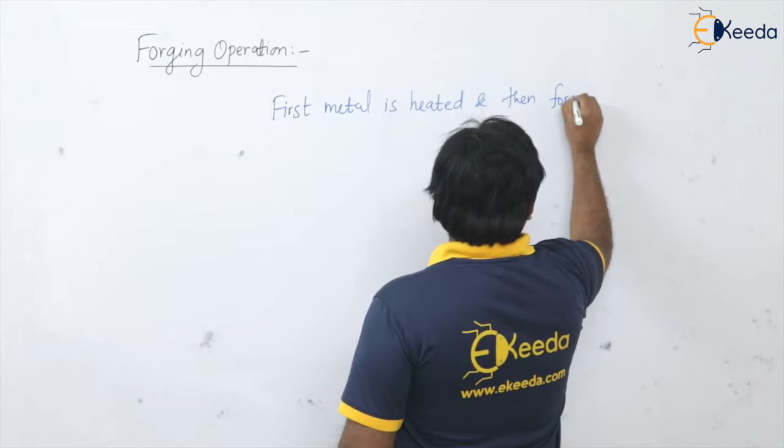So here first we heat the metal. First metal is heated, and then force is applied to manipulate the metal to get required size and shape or shape and size of the component. This is the forging operation.

And the stresses induced here are of course the pure compressive stresses that are going to induce into the material.

The forging operation is one of the oldest metal forming processes which is known to mankind since the Copper Age. This forging operation can have the hot forging operation, or sometimes we can use the cold forging operation also.

Now a very important characteristic or property of the forging operation is the manipulative ability, isn't it? The manipulative ability to control the grain flow. So that is a very important thing for the forging operation.

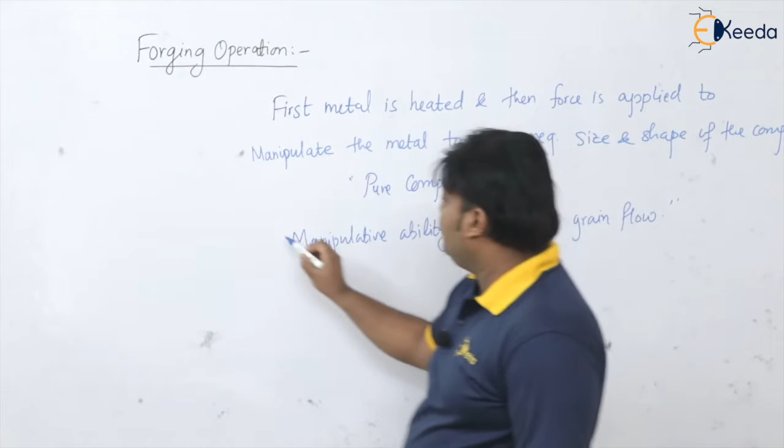Please remember, because of this manipulative ability to control the grain flow, we can get the best mechanical property in the specified direction. That is a very important characteristic of the forging operation. So required orientation of the grains is possible. Because of that, wherever and whatever good mechanical properties we want to impart in the product, we can easily get.

Now, as already discussed in the beginning of this topic, the limitation of all metal forming processes is that we can only go for uniform kind of shapes. But forging is the only metal forming process where, up to certain extent, we can produce some non-uniform shapes of the component.

Please remember, by using the forging operation only, we can have some extent of non-uniformity in the shapes of the product. But the limitation of forging itself is that we require a huge amount of forces and power consumption. If you require a higher amount of force or load, you need that much amount of power consumption. So the force and power consumption is quite high in the forging operation.

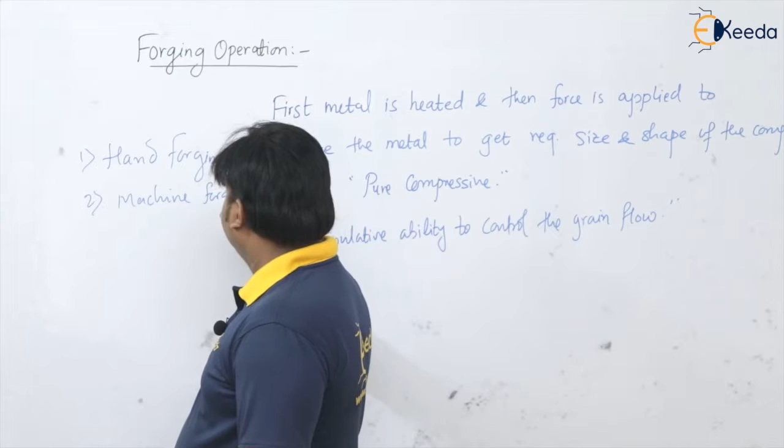In hand forging, whatever force is needed for deformation of the part is given with the human hands. Generally drop hammers are used for the force. That's why these are called hand forging operations. An example of hand forging is the blacksmith operation we have seen.

Now if you look at machine forging, we have press forging. In drop forging here the forces are applied by drop hammers, so the impact forces are going to form. These forces are sudden, and the kind of force, impact force, is going to apply on the product.

But in press forging, whatever force is applied on the component is not the impact force, it is not a sudden force, but it is the simultaneous force. Please remember.

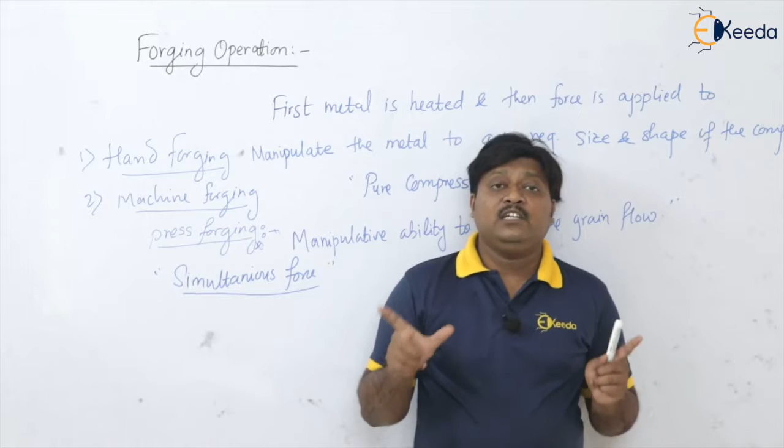So this is actually the press forging, and we can directly have the drop forging. Please remember, drop forging and press forging are the main classifications that we have, and these are actually the closed die forging operations. In both the operations, the closed die is used.

In case of drop forging, the billet material, that is the raw material, is kept on the lower die, whereas in press forging, we are keeping the material into the die. That is the basic difference.

And the force applied in drop forging is sudden force, the impact force, whereas in press forging we are having the simultaneous force. So simultaneously we are applying the force for deformation of the material, not instantaneous or impact loads. Please remember this.

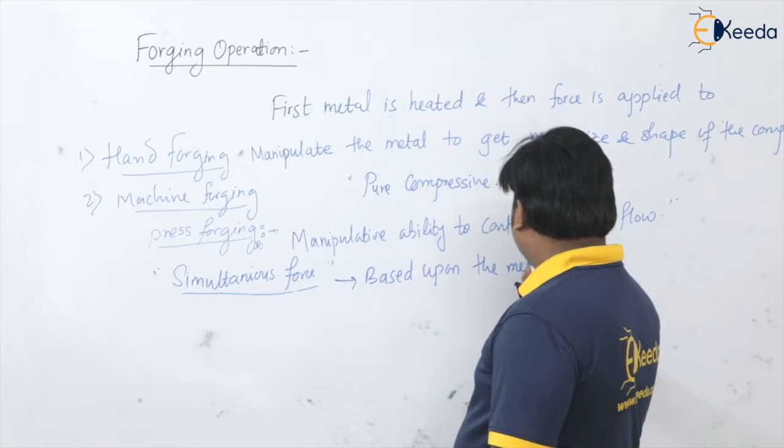Now, based upon the shape of the product obtained into the die, we are having the classification for forging operation, for press forging I am saying. So based upon the method of shape obtained, we are having number one, open die forging. Second, we are having closed die forging. Third, we are having semi-closed die forging.

And fourth, the bar forging. Let us see it one by one.

Open die forging is very simple. If the metal is kept between two dies and we apply force to get deformation, in open condition we are applying the force. This is open die forging, where we simply apply force between these two dies. The lower die is stationary, and the upper is a moving die, or moving platen. Die is also known as platen. Here is the material, and we apply the force. So this is open die forging operation.

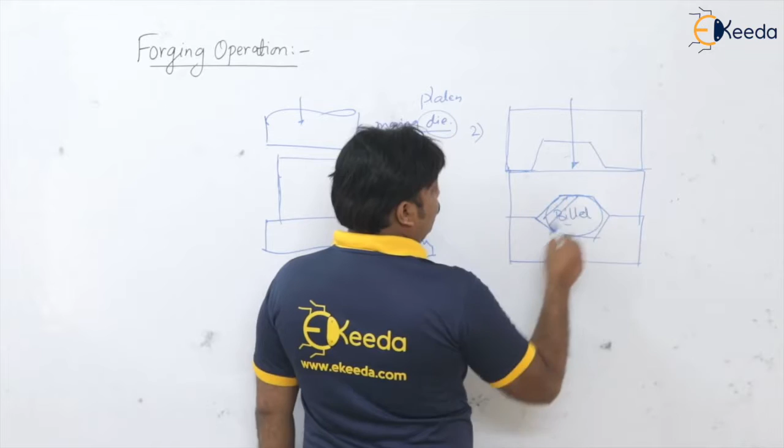Now you apply the force, and this billet material flows into each and every corner of the die as the dies meet together, and the entire surface becomes closed. After some time the die will be like this, so that the billet material flows to each and every corner in the die, and the part gets shaped like this. This is in closed condition, when the two dies are closed. So this is closed die forging operation.

This is the second one. First is open die forging, second is closed die forging. Now the third is what?

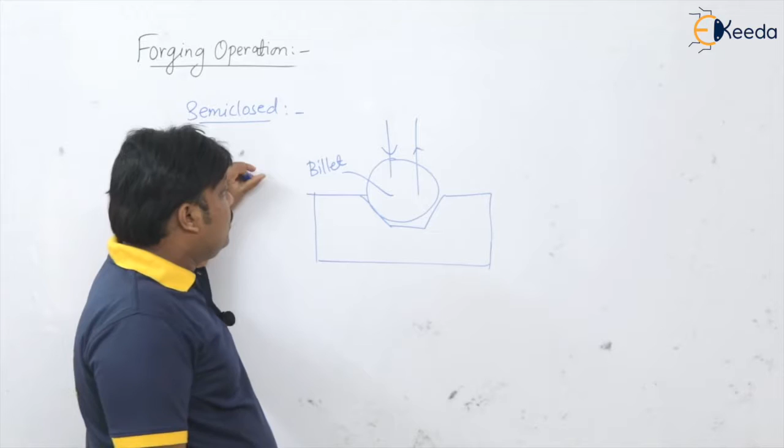We have semi-closed die forging. No doubt we use a die for the work, but here the forces are applied in open condition, just by changing the position of the billet material between the strokes given by the hammer or die. Whatever shape is on the die, the same shape is obtained on the material. Here, using this closed die, forces are applied in open condition by changing the position of the billet between strokes. That is why it is called semi-closed die forging operation.

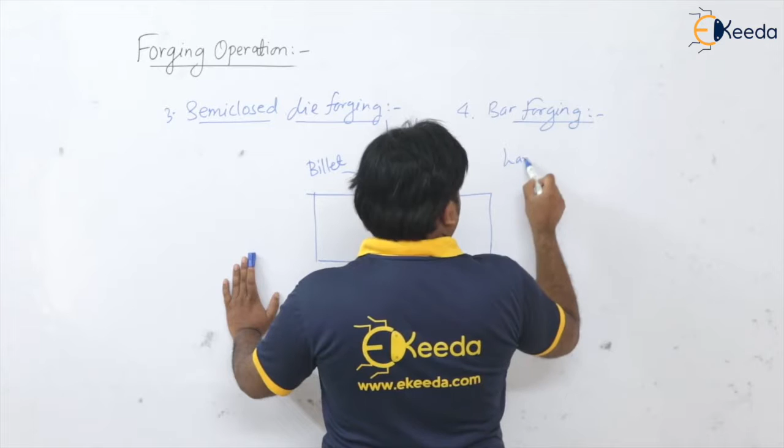The last one, the fourth and final type, is bar forging. Whenever we have very large components, if the component is very large, to deform it in forging you need a large amount of force and power consumption to achieve this.

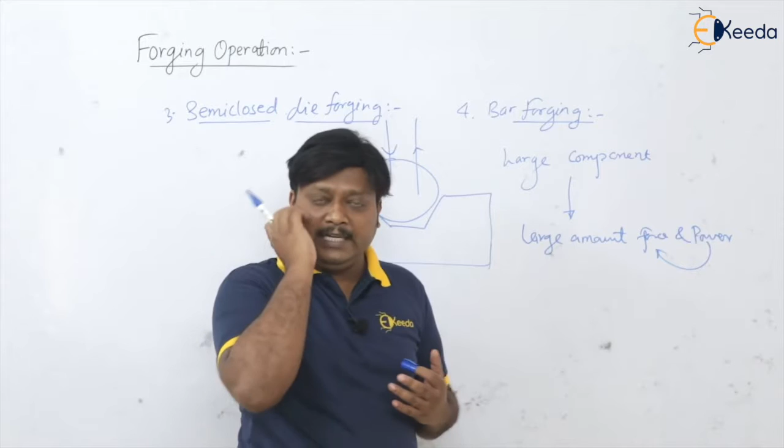So in that case, instead of forging the product at a single stroke, we forge the part little by little, separately. Instead of forging the entire component at a single stage or single blow, we use a number of steps, passes, or blows. We forge small portions repeatedly until the large component is completed. So instead of forging the entire part at a single stage, we forge a little quantity at a time, and using this repeated small forging we get the entire component. This is known as bar forging.

So these are the techniques based upon the method of shape obtained by the positioning of the component: open die forging, closed die forging, semi-closed die forging, and bar forging. This is the basic classification of the forging process.

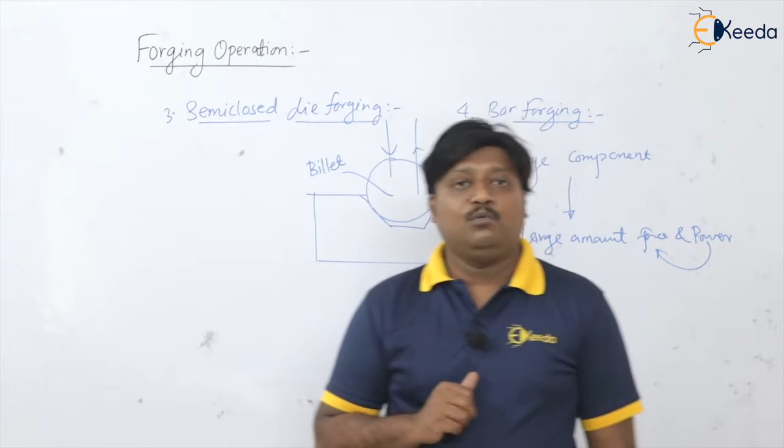Now we are going to see the analysis of forging operation. For that, I am taking the top die, which is moving, and the cylindrical billet is placed on the bottom die, which is stationary. So this is the top die, this is the bottom die, and this is our cylindrical billet material or raw material.

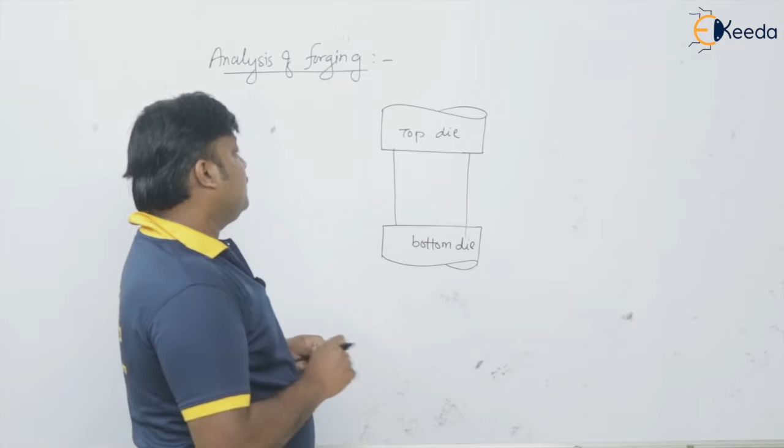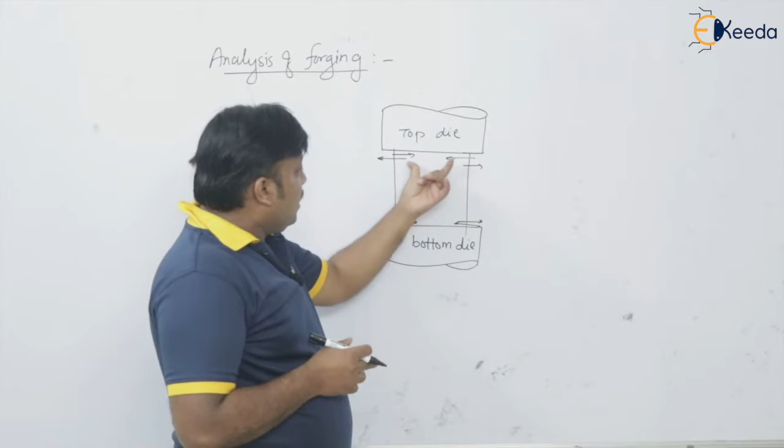In the initial condition of forging, when force is applied by the top die onto the workpiece, outward expansion forces and inward frictional forces exist at the interface between the die and raw material. So initially, when the force is applied by the top die onto the billet material, at the interface of the die and billet, outward expansion forces and inward frictional forces come into play. Here, the inward frictional force is greater than the outward expansion force.

So because of that, what is going to happen? The raw material or this billet material is going to stick on the die surface. When the die is moving towards the center of the height of the component, the outward expansion forces go on increasing, whereas the inward frictional forces stay the same. As these outward expansion forces increase while the die comes down, there will be bulging of this cylindrical raw material, meaning the diameter increases at the middle.

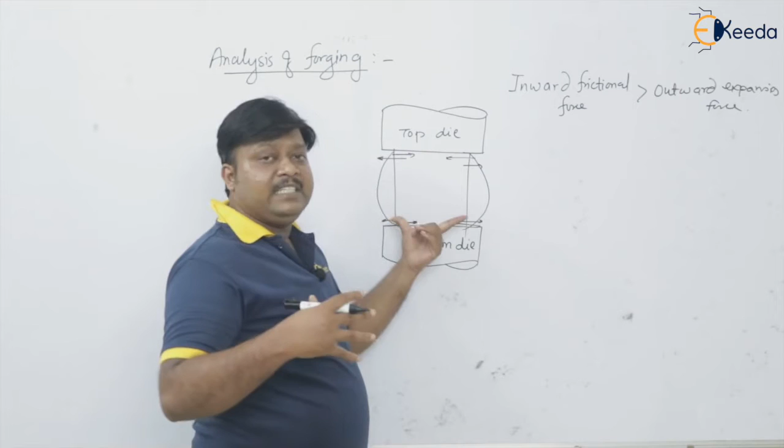That is also called barreling. Bulging or barreling will occur because of the outward expansion forces going on increasing.

This first initial condition of the forging operation we can call the sticking condition, where the material sticks on the die surface and bulging occurs. So the first part of the forging operation can be analyzed by the sticking friction mode.

Now the die moves ahead to get this billet material forged. So at some moment, what happens? The outward expansion forces become more than the inward frictional forces.

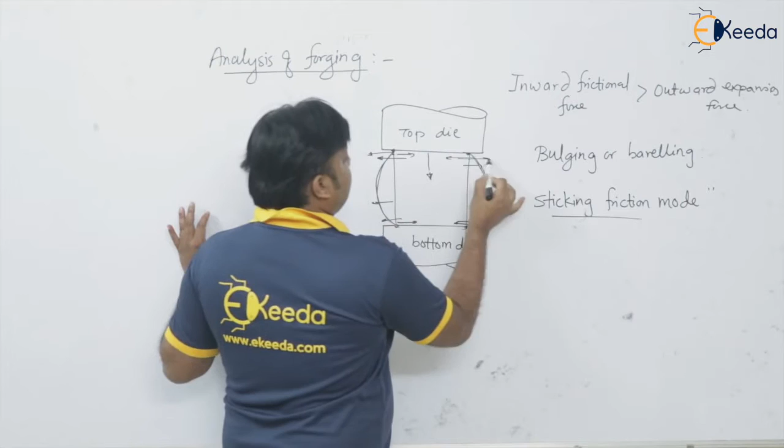After a certain time, the inward frictional forces are stationary and constant, but the outward expansion forces go on increasing. That's why the material now starts to slide over the die surfaces, and because of that, we now get the straight cylinder.

Before there was barreling, and at the ends the material was sticking to the die surface. Now, because the outward expansion forces are more, the material slides over the die surface, and we get the straight cylinder. So bulging disappears and you get the straight cylindrical workpiece having changed dimensions.

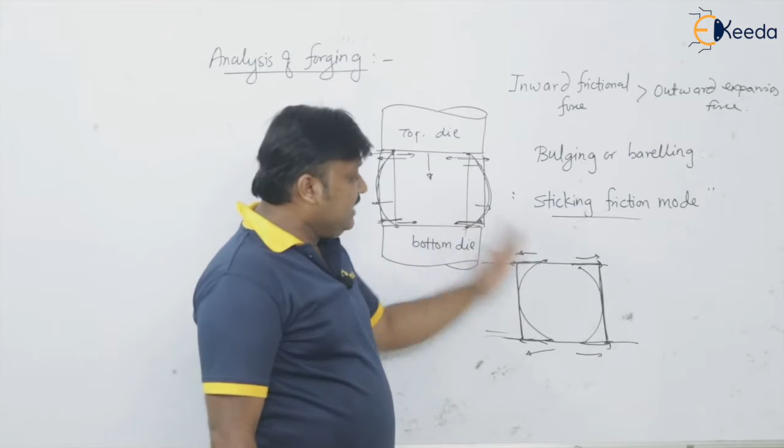Suppose the original diameter D0 was there initially, and original height H0 was there initially. Now the diameter becomes D final and height becomes H final. You can see, because of this upsetting, this is nothing but open die forging — between the two dies we are compressing or deforming the material. This is the upsetting process, so there will definitely be a decrease in height and increase in diameter.

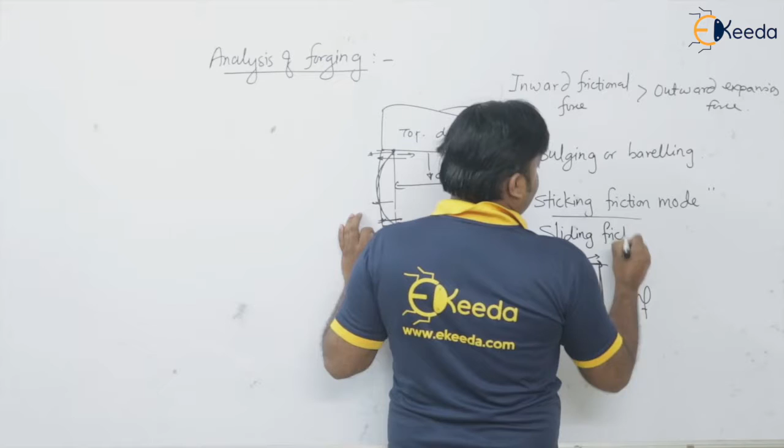So this second part of the forging operation is known as sliding, and this second model, the sliding model, can be analyzed by the sliding friction model. So the forging operation can always be analyzed first by the sticking friction model and then the sliding friction model.

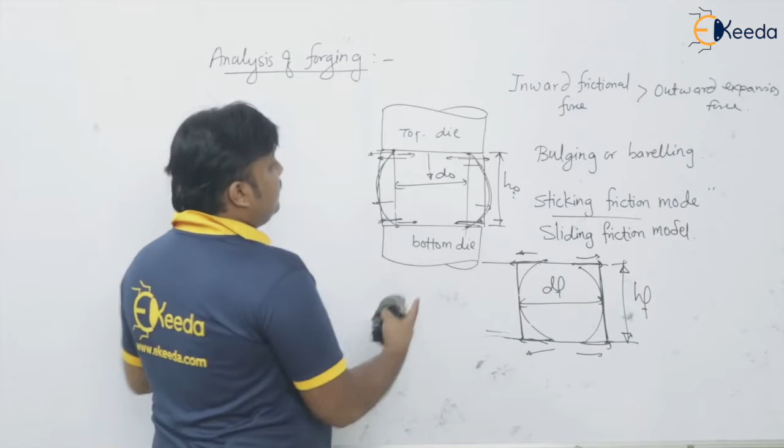Because initially the inward frictional forces are more than the outward expansion forces, we get very accurate dimensions in the forging operation. So this is the basic thing about the analysis of forging, on which basis we do the analysis — these are the two conditions.

Now, one more thing I want to discuss here is about open die forging and closed die forging operations. As just discussed, this operation was an open die forging operation, but when we talk about closed die forging operations, I want to talk about the volume of raw material we take for the open die forging operation versus the closed die forging operation.

Generally in open die forging, whatever volume of material of the final product you want to achieve is taken as the volume of raw material — that is, the volume of the final product equals the volume of raw material you take for the forging operation. But when you talk about closed die forging operation, you have to take, say, X as the volume of the final forged product.

If you want to take the raw material for the forging operation, the volume of that raw material in the closed die forging operation is 10 to 20% more than the volume of the final product. Why is it so?

During closed die forging, we want to confirm that the material reaches each and every cavity or impression in the closed die. Once the die closes, we cannot see how the material flow happens. For that reason, the volume of raw material in closed die forging is 10 to 15% more than the volume of the final product.

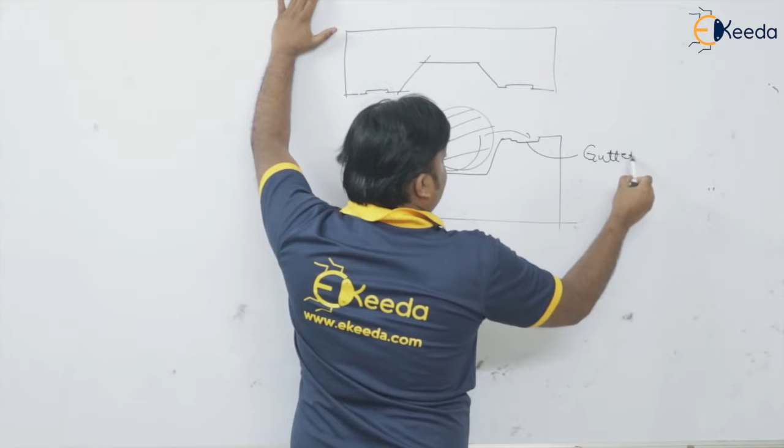For that reason, in closed die forging we provide gutters into the die, so that after filling the mold cavity with the billet material, this excess material goes and accommodates these gutters.

Once the operation is over and you get the product, the extra material fills into the gutters, and you get the final product like this. This excess material comes in the form of flash - please remember this. Of course you want the final product, so this flash is an unnecessary attachment to the main product.

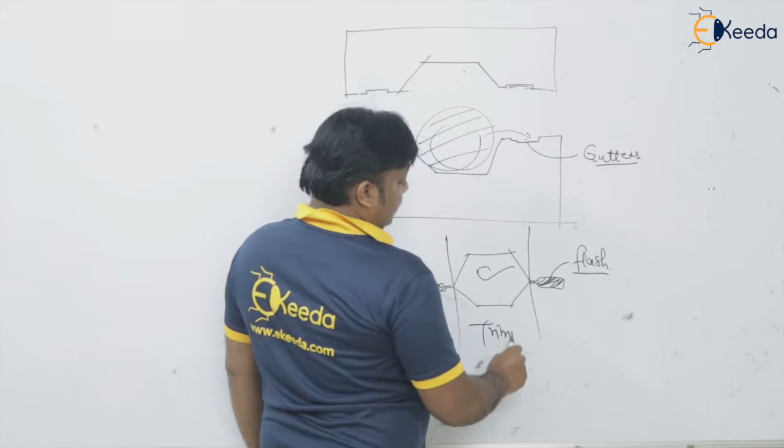This flash can be cut by the trimming operation, and you will get the required product.

Please remember this. Okay dear students, now in this video we are going to see the force calculation for the forging operation.

If you look at the analysis of forging operation, it is basically done with two models: one is the sticking friction model, and the second is the sliding friction model.

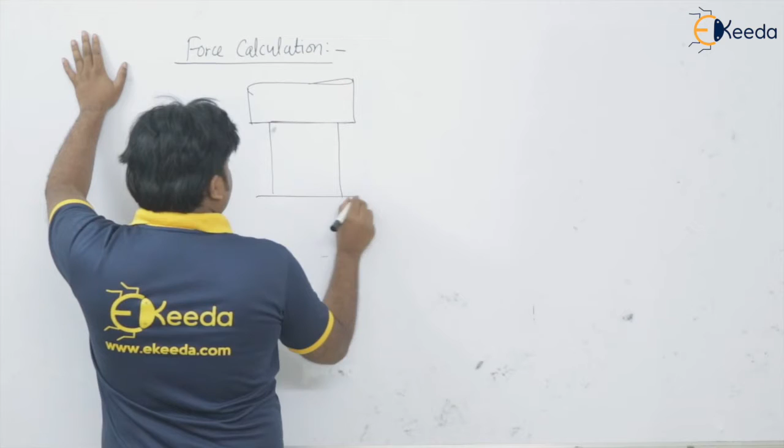Let us take for example the open die forging operation. Here this is the moving platen and the bottom die is the stationary platen. This is the workpiece having original diameter d-original and original height h-original. When force is applied by this moving platen onto the cylindrical billet, what is going to happen?

So when it comes down, you will get an increase in diameter - this is d-final - and a decrease in height.

Now if we apply the volume constancy principle, which is valid in metal forming operations, I can write original area into original height equals final area into final height, since area into length is the volume. So original area is pi by 4 times d-original squared into h-original, equal to pi by 4 times d-final squared into h-final. Pi by 4 gets cancelled.

So the relation between the diameter and the heights we get is: d-final divided by d-original equals under root of h-original upon h-final.

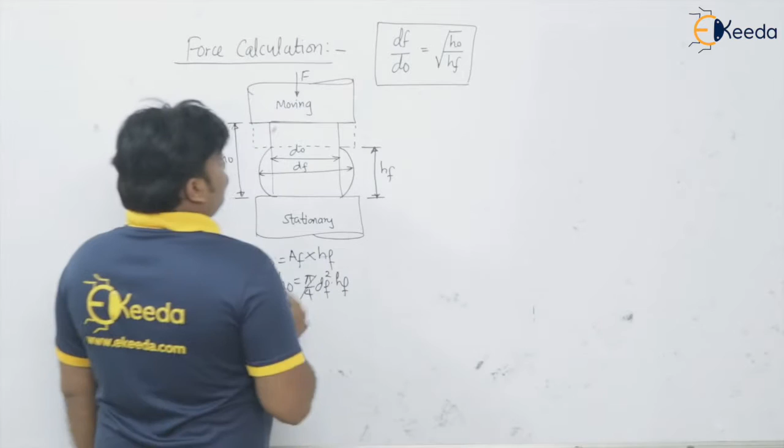So the main assumption for the forging force calculation is that the force in the forging operation is maximum at the end of the operation. Please remember this - maximum force occurs at the end of the operation, or at the end of the stroke.

Now we have to find the minimum initial force, F initial. How to calculate this? It is the yield strength, or flow strength of the material, into the original area. Similarly, the final minimum force, F final, should be sigma y into A final.

You know A original is pi by 4 times d original squared, and A final is pi by 4 times d final squared. Once you get these two values, we calculate F average, that is F initial plus F final divided by 2.

Now if the efficiency of forging is given in the operation - general efficiency of forging is 0.5 to 0.6, that is 50 to 60%. If it is given, then F actual will be this F average divided by the efficiency of forging.

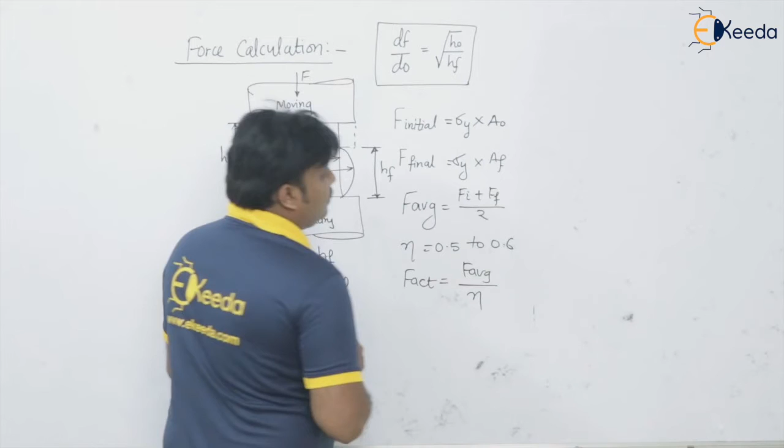Now from here we got this force actual, and ahead of this I want to find the work done or energy required in this forging operation. It will be F actual into the work distance traveled.

This platen moved from here to here - original height h naught and final height h final - so you get this distance. What is the displacement actually? H original minus h final, that is the displacement of the platen.

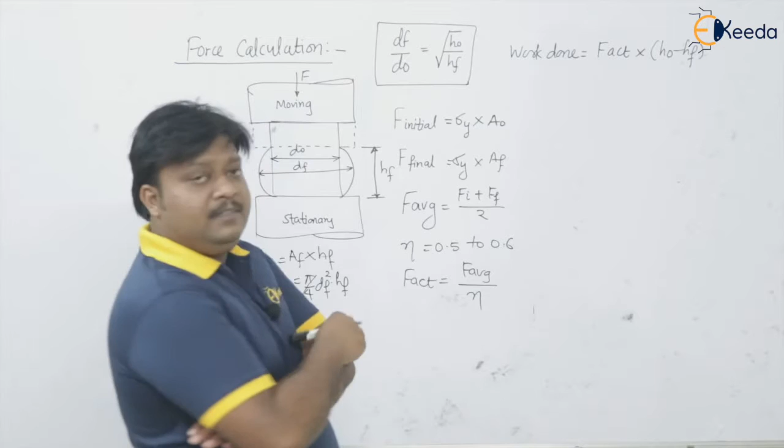So this is the force and the work done. Now let us say this forging operation and the drop forging operation have the same work done. Here is the weight of hammer, this is the hammer of weight W, and it is freely falling from height h onto the workpiece.

This is the workpiece. To get the same amount of work done in case of this drop forging operation, how do we calculate the height of fall of this hammer? If the weight of the hammer is known, how to calculate this height of fall?

So in drop forging, the potential energy stored by the hammer gets converted into impact energy. And we know that the impact energy is twice the potential energy in case of sudden loads.

So if I write impact energy equals twice potential energy - impact energy is nothing but 2 times W into H, and this is impact energy, nothing but the work done, which we are getting from this equation. If you put the work done value and the weight of the hammer W, you get the height of fall, H equals work done divided by 2 times W. In that fashion we can calculate the height of fall in drop forging operation.

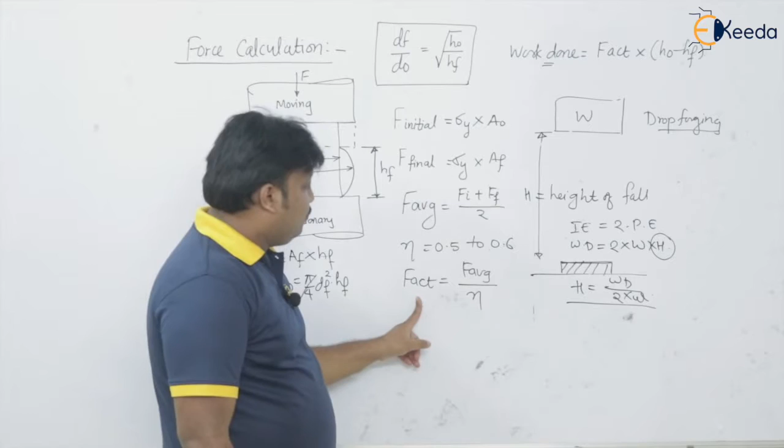When the coefficient of friction is given in the equation, please remember that this actual force is basically given as F actual, we can have directly F actual.

Where is the force maximum in forging? At the end of the operation or at the end of the stroke. F actual at the end of the stroke, blow, or stage is given by sigma y into final cross-sectional area.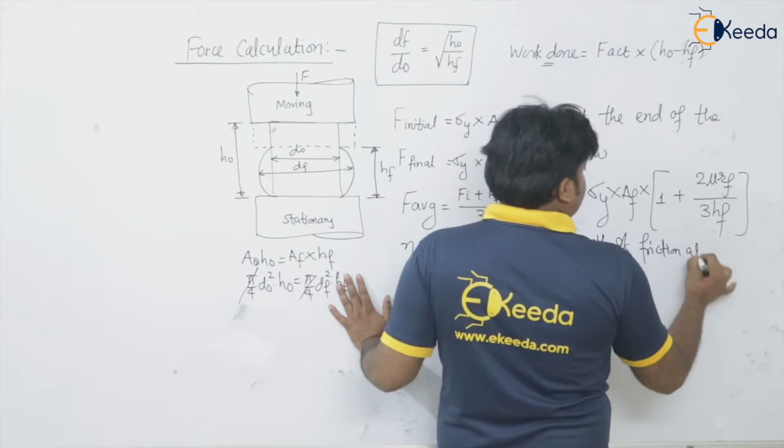But when friction is there, it is given as that into 1 plus 2 mu Rf divided by 3 times Hf, where mu is the coefficient of friction at the die and workpiece interface, Rf is the final radius of the workpiece - that is df by 2 - and Hf is the final height.

So this is the actual force at the end of the stroke. We can get it directly from this formula. No doubt we can derive it, but there's no need here.

As far as GATE examination is concerned, try to have the formulas whichever we have explained in the class. No need for the derivation. F actual here you can calculate when the coefficient of friction is given to you, and what they will ask is to find the actual force at the end of the stroke, or end of the operation, or at the end of the blow. So this is how we can calculate the force in the forging operation.

So let us see this example on forging. A cylindrical billet of 200 mm diameter is forged from 100 mm height to 80 mm at 1100 degree centigrade. The material has a constant flow stress of 100 megapascal. Number one, we have to find out the energy required for producing the deformation. Second, if a 15 kilonewton drop hammer is used to complete the reduction in one blow, what will be the height of fall? We already discussed how to calculate the work done and the height of fall.

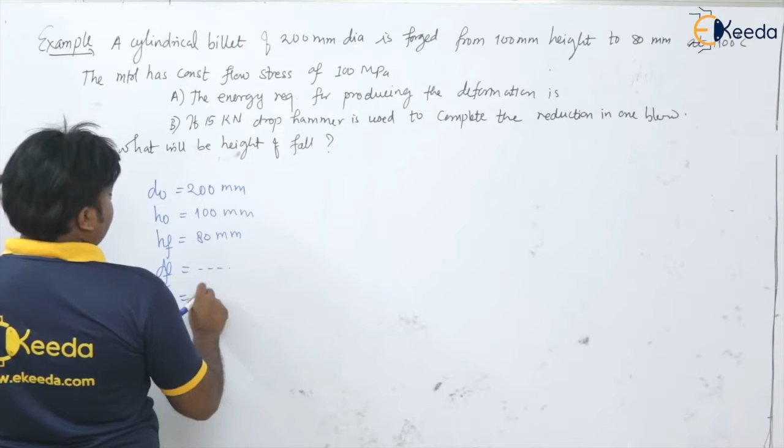So let us see. The initial diameter is 200 millimeter, and the original height is 100 millimeter, to the final height 80 millimeter. The final diameter is not available with us, we will see how to find it. The sigma flow, or sigma y, is given as 100 megapascal. We know the energy or work done in forging is F actual into H original minus H final. So first, to calculate F actual, we need F initial minimum, that is sigma y into A original, and F final minimum, that is sigma y into final cross sectional area. For that we require the final diameter.

So by the continuity equation, A naught into H naught is equal to AF into HF. Pi by 4 DO square into HO is equal to pi by 4 DF square into HF. Pi by 4 gets cancelled, so DF is equal to DO into root of HO by HF. Put the values: DF is equal to original diameter 200 into root of H original 100 divided by H final 80. So the final diameter comes out to be 223.60 millimeter. We got the final diameter by volume constancy.

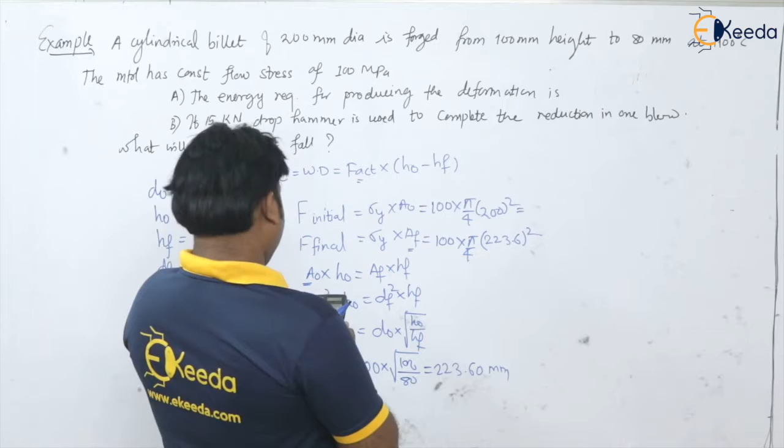Now, what is F initial minimum? Sigma flow or sigma y is 100, into A original, pi by 4 D original square, that is 200 whole square. And F minimum at the final stage will be 100 into pi by 4, diameter final stage 223.6 square. Putting the values: 200 square into 25 pi, it is in kilonewton, or mega newton, that gives 3.14 mega newton. And for the final stage, 223.6 square into 25 pi gives 3.92 mega newton.

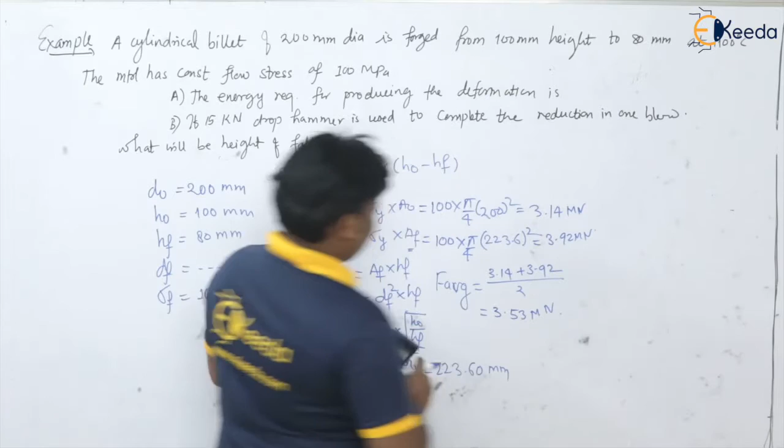Now if you take the average value, it will be F initial plus F final minimum divided by 2, that is 3.14 plus 3.92 divided by 2, which gives the average value as 3.53 mega Newton. Once you get this average force, since efficiency is not given, we take the force directly.

So F actual is 3.53 into 10 to the power 6, into the original height 100 millimeter minus final height 80 millimeter. Converting millimeter into meter, that is 10 to the power minus 3. So it is 3.53 into 10 to the power 6 into 20 into 10 to the power minus 3, which gives 70,600. So the work done is 70,600 Newton meter, or 70.6 kilonewton meter.

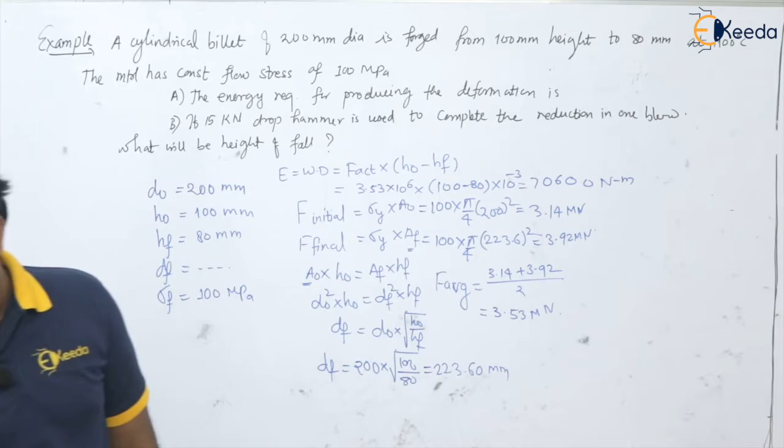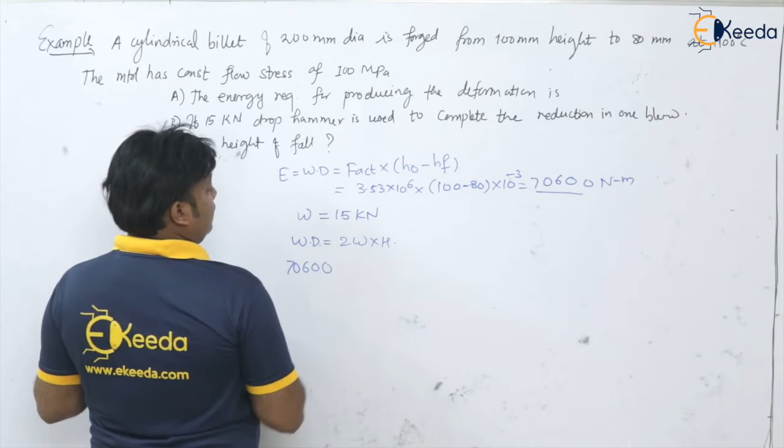After this work done calculation, the next question asks: if a 15 kilonewton drop hammer is used to complete the reduction in one blow, what will be the height of fall? The weight of the drop hammer is 15 kilonewton. And the work done in drop forging is 2 times W into H. We already calculated the work done as 70,600 in a single stroke. So it becomes 2 times weight of the hammer, 15 into 10 to the power 3 Newton, into H.

So to calculate the height of fall, consider the weight of the hammer falling from a certain height onto the workpiece to produce the work done of 70,600 Newton meter. So how much will it be?

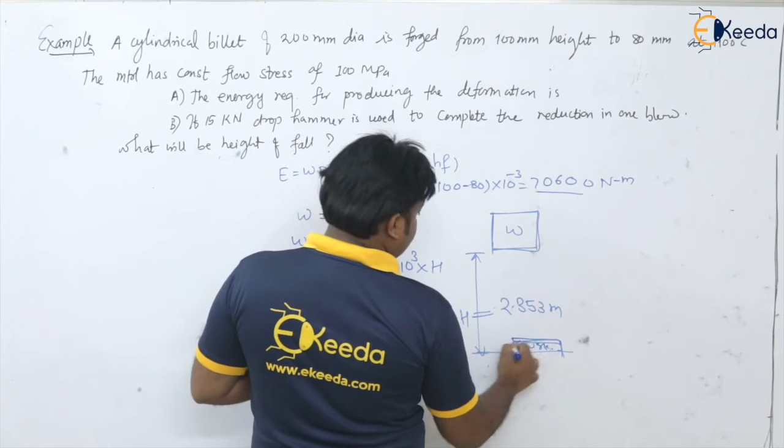Divided by 30,000, it is 2.353 meters. It is 2.353, and through this height it will fall onto the work or billet material to get this much work done.

Okay, so this is how we can solve the question on force calculation for the forging operation. Now one more question I want to take here. I will not write this question. What I will do, I will read it.

Options are: 20.8 kilonewton, 31.0 kilonewton, 78.6 kilonewton, and 88.6 kilonewton. Okay, so cylindrical stainless steel workpiece of 200 mm diameter and 150 mm length.

So I will draw the diagram so that you can understand, and I will write down the given data. A cylindrical workpiece between two flat dies, original diameter is 200, and height is how much? It is 150 mm. Okay, these are in millimeters.

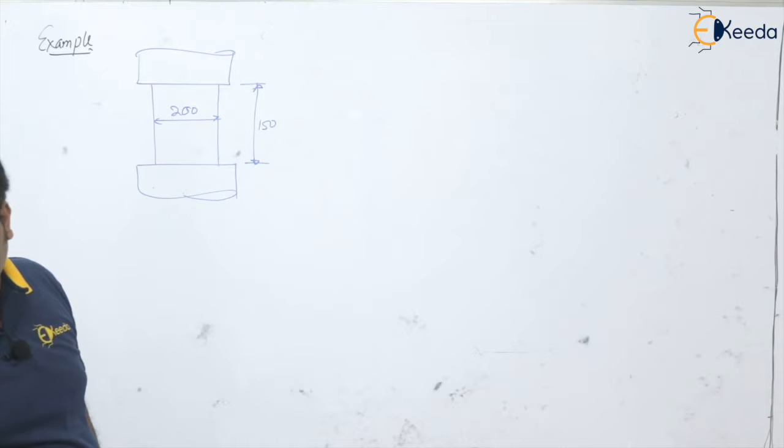And what they are saying, this component is reduced to 50% height. So height is getting reduced by 50% when this moving die will come down and apply the force. So after some time there will be an increase in diameter, that is not given, but height is how much now? The height now 50% reduced, that is 75 millimeter. This is our H final.

D final we have to calculate. Okay, and what is coefficient of friction? Mu is 0.2, and the flow stress sigma y or sigma f is 1000 megapascal. So students, this is kind of an upsetting process, isn't it?

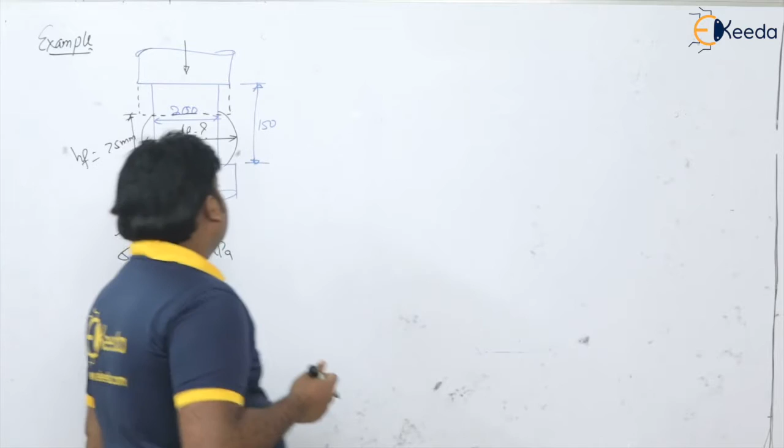And what is given here? See, original diameter 200 millimeter, final diameter we have to find out, original height 150 mm, and 50% reduction means it becomes 75 at the end of the operation. Okay, and mu is given 0.2, flow stress is given 1000 megapascal.

So first of all, let us find out the value of Df. That is, D naught squared H naught is equal to D final squared H final, by volume constancy. So what is D final? That is D naught under root of H naught by H final.

What is D original? D original is 200, into root of H original 150 divided by 75. So 200 into root 2. 200 into root 2, it is 282.84 millimeter. This is the final diameter, isn't it?

So what is the force at the end of the stroke? Always see, this is the assumption we have already learned, that the maximum force is at the end of the operation in the forging process. So F actual, we know that whenever the mu value, coefficient of friction, is given. What is this F actual? This is nothing but sigma y into final cross sectional area into bracket 1 plus 2 mu Rf divided by Hf. We know this.

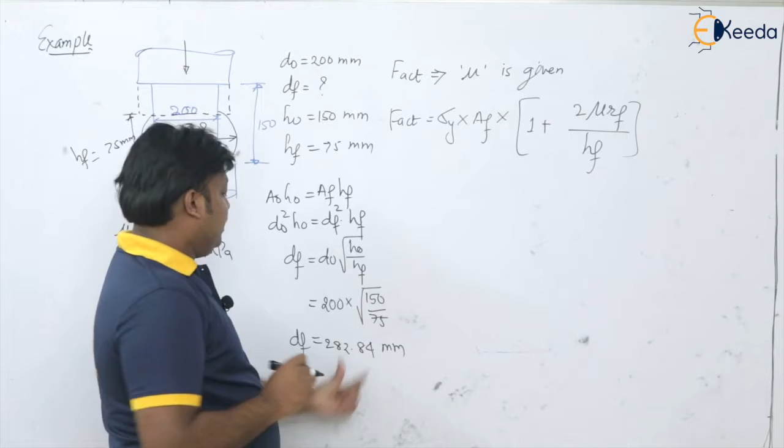Now R final, how much? This 282.84 divided by 2, you will get the R final. How much? 282.84 divided by 2, it is 141.42 millimeter. Okay, so sigma y is 1000 into pi by 4, d final diameter, that is 282.84

squared, into bracket 1 plus 2 into mu, how much? 0.2. Okay, into Rf, 141.42, divided by final height 75 millimeter. So calculate this and you will get the answer.

So into 2 into 0.2 divided by 75, 1 plus answer into 282.84 squared into 250 times pi. So it is how much? 141.42 into 0.2 into 2 divided by 75 plus 1 into...

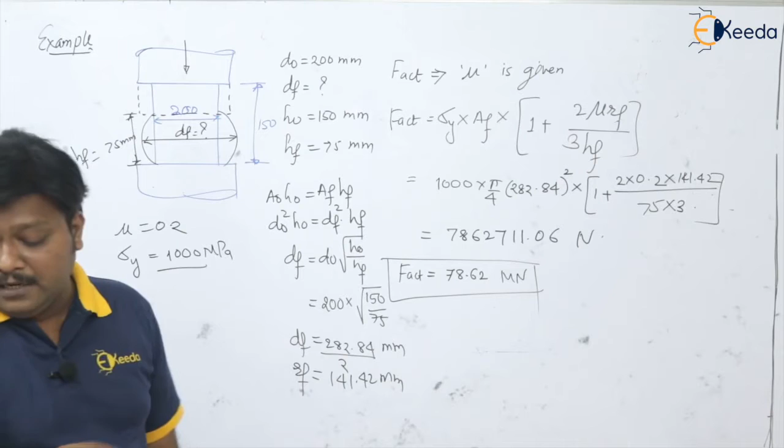Okay, so the options should be in meganewtons. The options are 20.8 meganewton, 31 meganewton, 78.6, and 88.6 meganewton. So, answer will be what?

This will be 78.62 meganewton. So these are the kinds of questions on the force calculation in the forging operation.

Go through it. In this video, we are going to see the various preliminary forging operations. So what are we going to see now? The preliminary forging operations.

We will see it one by one. Number one is the fullering operation. So in the fullering operation, what we are doing is elongating the material along the lengthwise direction. So definitely reducing the cross section area and increasing the length, but it is non-uniformly.

If you see the fullering, suppose on the anvil, say this is the anvil. Here is the lower fuller, or bottom fuller, and here we are having the top fuller. Here we are going to get the marks of this fuller onto the work surface. We are getting some marks here.

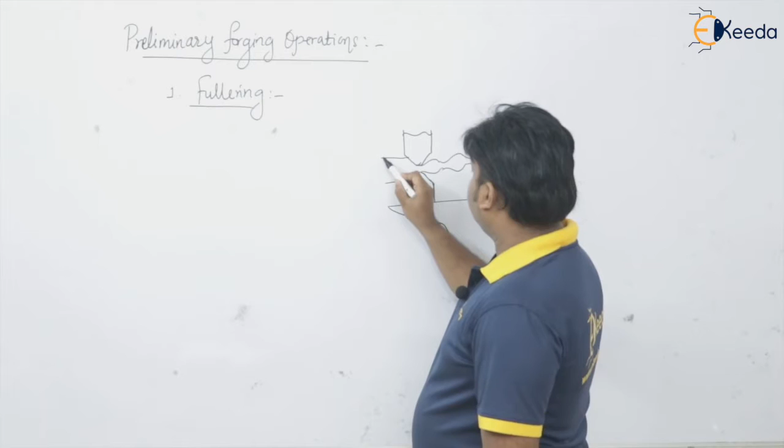Say this is the work, this is the top fuller, this is the bottom fuller, and this is the anvil. So in this fullering operation, we are distributing the material from center to the outward, but non-uniformly, isn't it?

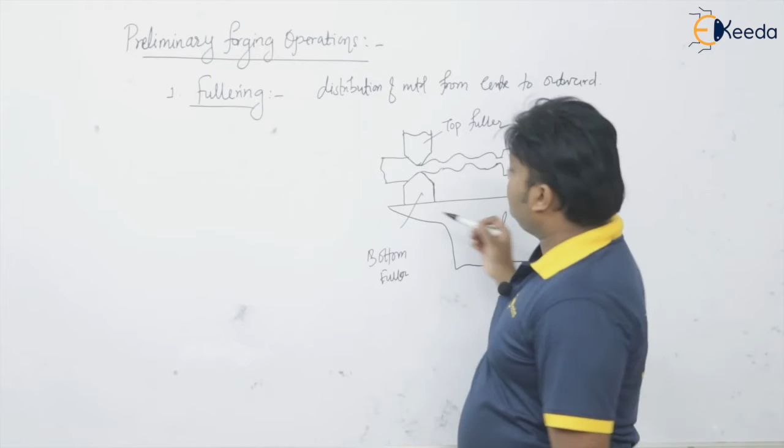Distribution of material from center to outward. So because of that, what is going to happen? The length of this workpiece is going to increase, but the cross section, for example the diameter, is going to reduce.

So here the force is applied perpendicular to the axis of the workpiece, isn't it? The force is applied in the direction perpendicular to the length axis.

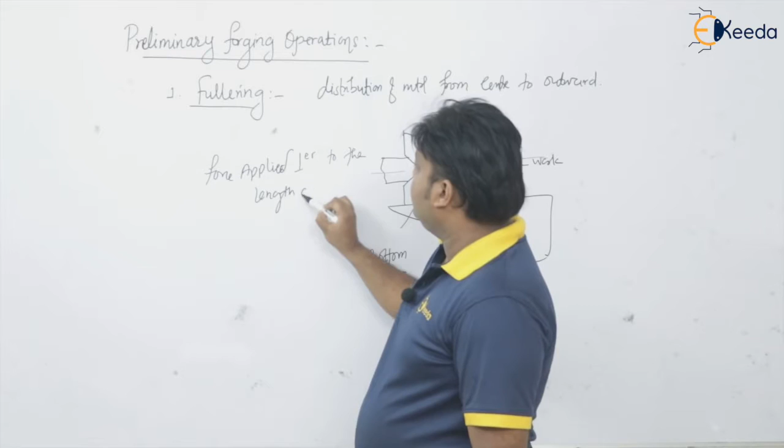And of course, because of these marks of the fuller, we can have this non-uniform process. To remove these marks of the fullers, what we have to do? We have to use flattening. The flattening process is done so that we can remove the mark and make the part more uniform.

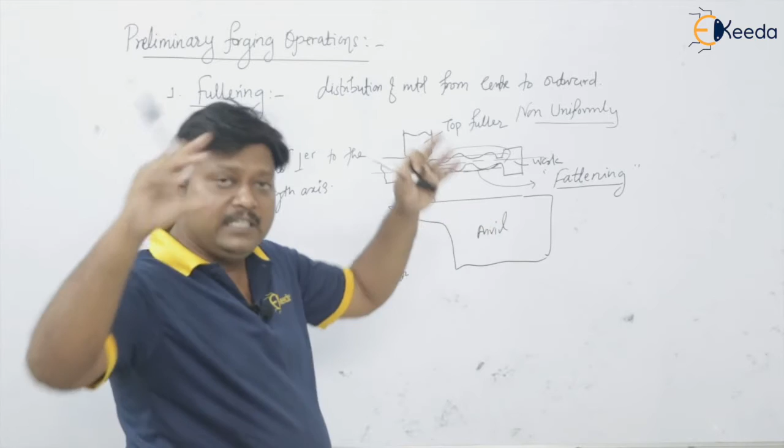So basically the idea is this: in the fullering operation, the material is distributed from the center to the outward direction. Length is going to increase, cross section is going to decrease non-uniformly. So this word is important here.

Now the next operation we are having is the drawing out operation. So in drawing out, the same thing we are going to do. We are going to elongate the material in the lengthwise direction, and we are decreasing the cross section of the component, but more uniformly. Please remember, it's the same process as before, but uniform.

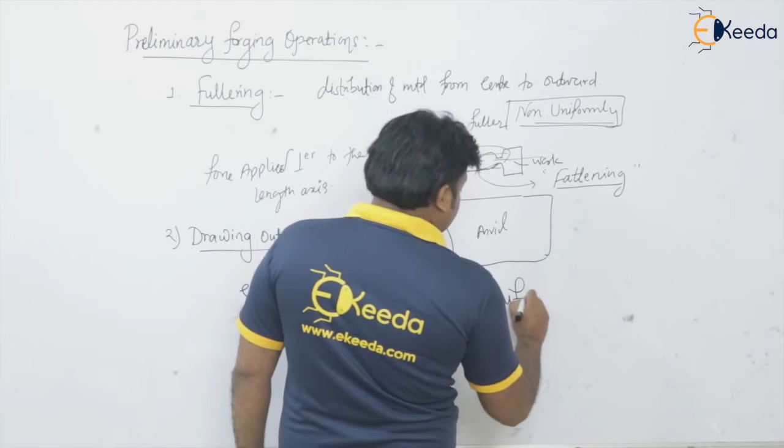So the distribution of the material from center to outward, increasing the length and decreasing the cross section, that is the diameter of the component or workpiece. This is known as the drawing out operation.

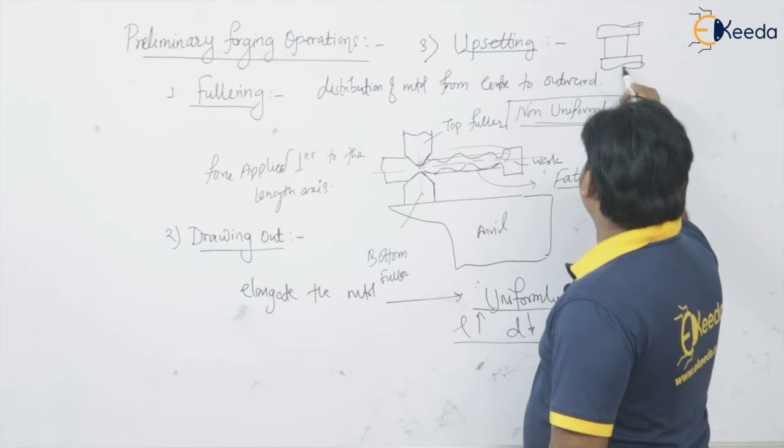Then the next operation, the third one, is upsetting. This is simply what we have seen in the open die forging operation. Here the material is going to compress between the two flat dies. This is the top die, this is the workpiece material or billet material, this is the stationary die, this is the moving die, and we are applying compressive force. So what is going to happen is the length is going to decrease but the cross section is going to increase.

This is the upsetting, the third preliminary forging operation. Then we are having the fourth process, which is flattening. Flattening is used to produce the flat surface, or to put more uniformity in the workpiece. As we have seen in fullering, the part is no more uniform, so to remove that non-uniformity we used flattening after the fullering operation. So that is producing the flat surface, that is the flattening.

Then fifth we are having edging, also known as edgering. So what is meant by this? This is nothing but collecting the material at the ends of the given workpiece or given bar. So distribution, or collecting the material at the ends of the given bar or rod, whatever the operation is. So this is the edging operation.

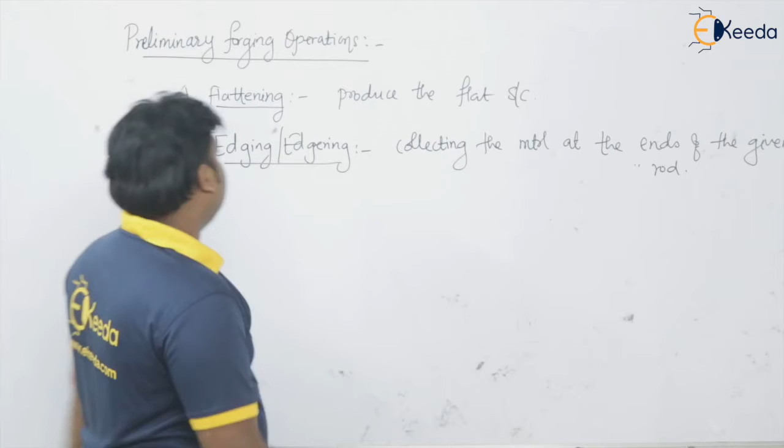The sixth one we are having is chamfering.

Chamfering is what? Making the sharp corner into smooth corners with some radius. That is nothing but chamfering. Chamfering is converting the sharp corners into smooth corners by giving the corner radius. Smooth corners, yes or no? So this is chamfering. Seventh one we are having the bending.

We have learned this operation bending, or we are going to learn this operation in the sheet metal operations. So bending is the operation where the material is deformed along the straight axis, which lies in the neutral plane. Bending is nothing but simply bending the component or workpiece in a required angle.

For that we are having various dies. We are having wiping die, single edge die - these are the same. Wiping die and single edge die are the same. Then we have V bending die, U bending die. These are the various kinds of bending operations we have.

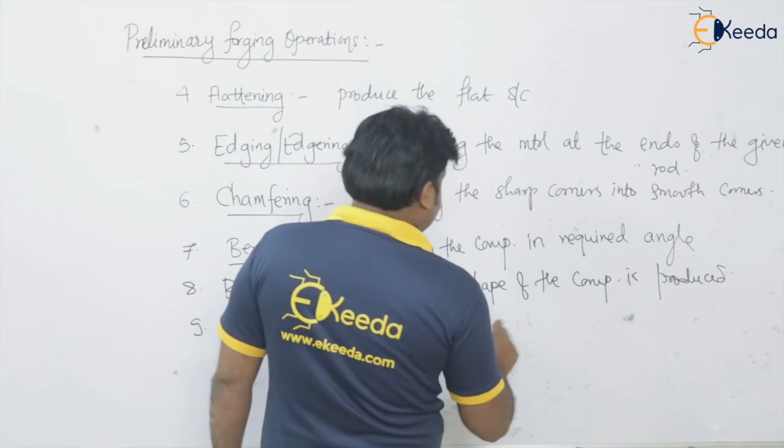Ninth operation is our finishing operation. Finishing means what? The exact size and shape of the component is obtained. Exact shape and size of the component is going to be obtained.

And the last one I will write here, the trimming operation. So whatever excessive material which has flown circumferentially, in case of closed dies, as a flash, that can be removed by the trimming operation. That is removal of excess material from the components. For example, in a bracket, the flash is going to be removed by the trimming operation. Please remember that trimming is always done after finishing, or I can say finishing is always followed by trimming, and blocking is always followed by finishing.

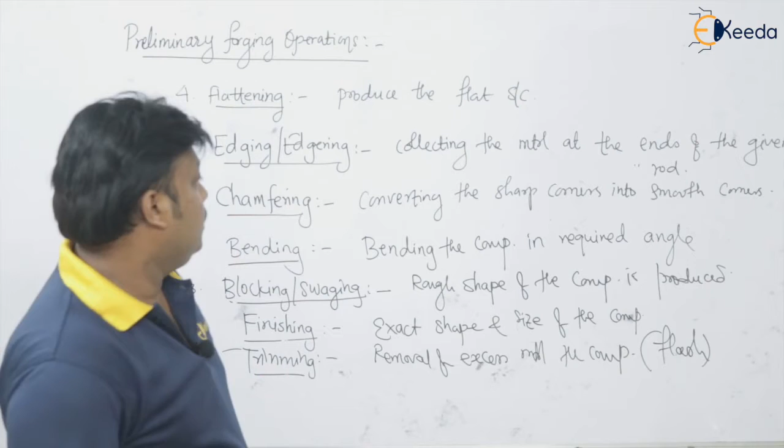Now see, this is 4, 5, 6, 7, 8, 9, 10. So I will write once again whatever the processes or operations, preliminary operations, which we have discussed. So number 1 - what was number 1? Fullering. Then second was drawing out. Third was upsetting. So 1, 2, 3, 4, 5, 6, 7, 8, 9, 10.

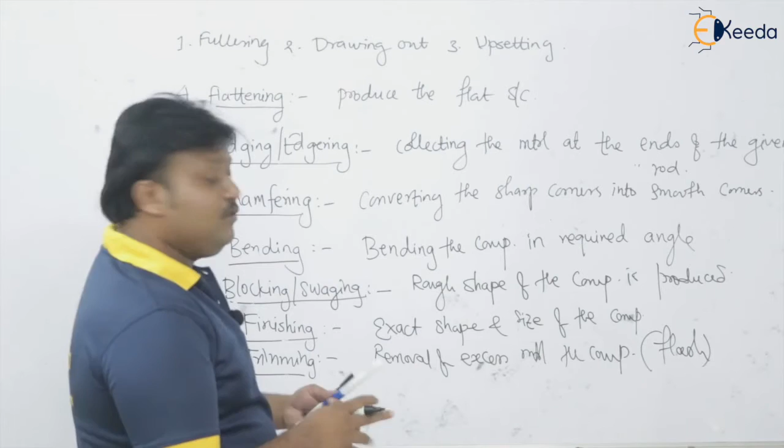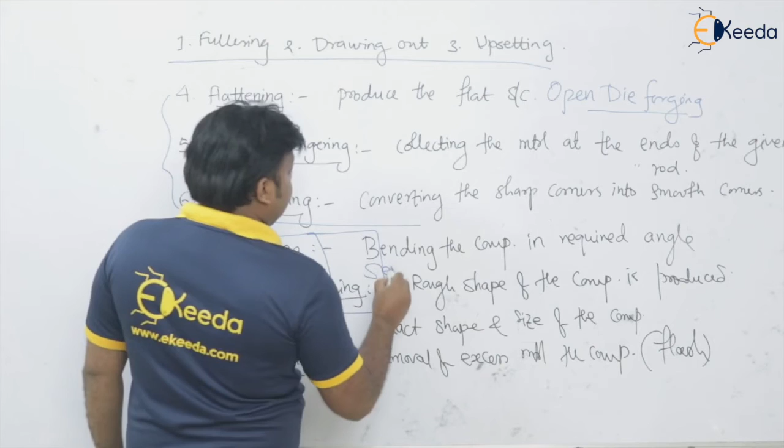So see, if you look at these first six operations - these three operations and these three operations up to chamfering - please remember these three plus three, or six operations, are the open die forging operations. The operation number 7 and 8, that is bending and blocking operation, these are semi-closed die forging operations. Please remember this. And finishing is pure closed die forging operation. Please remember, very important.

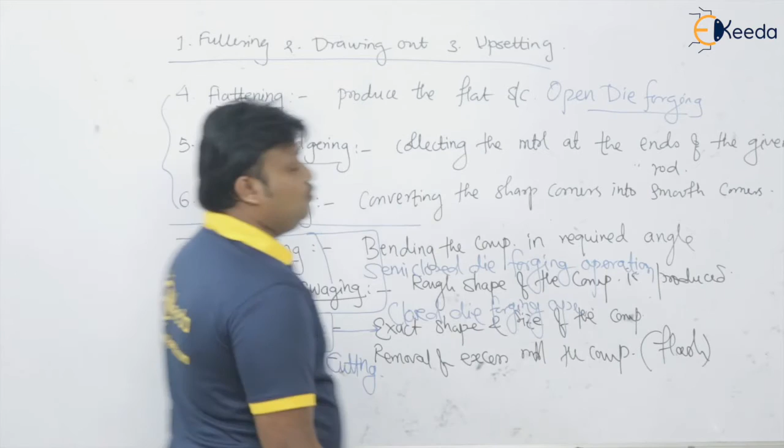And trimming is what? It is nothing but the cutting operation. So you should know which are the open die forging operations, which are the semi-closed die forging operations, and which is the closed die forging operation. You should be able to tell.

Now, by using these forging preliminary operations, if I ask you to make the connecting rod which is used in the engine - the connecting rod is basically manufactured by forging operations only, by forging technique only. So let us, by using some of the operations, suppose if I give you the question like this.

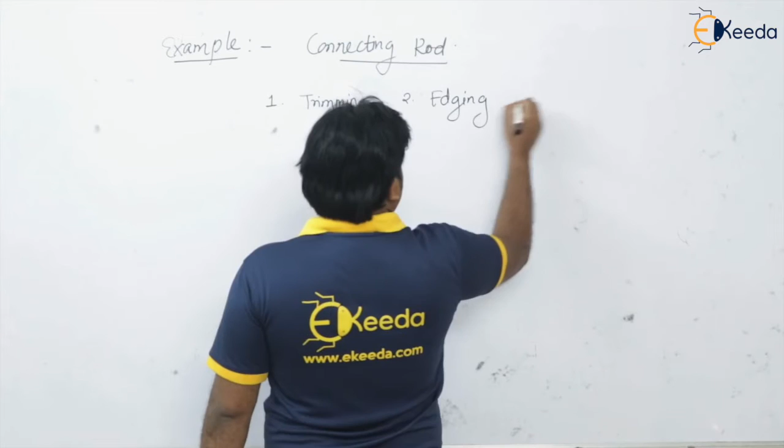Suppose if I take the example of manufacturing the connecting rod. So in the question, suppose I give you various preliminary forging operations - say number one I give you trimming, the second number I give you edging, the third operation I give you fullering, fourth operation I give you blocking, fifth operation I give you finishing.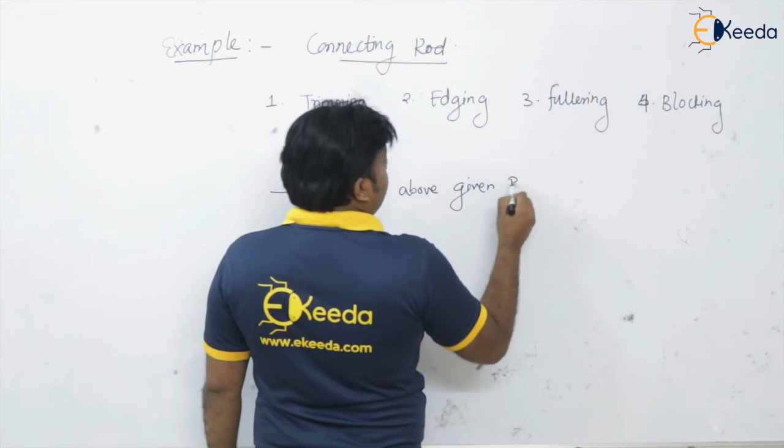So these are the operations if I give you and ask you to arrange the above given preliminary forging operations in proper or correct sequence, and in the options I give you various kinds of sequences - option A, B, C, D - then this is a 2-mark question, isn't it?

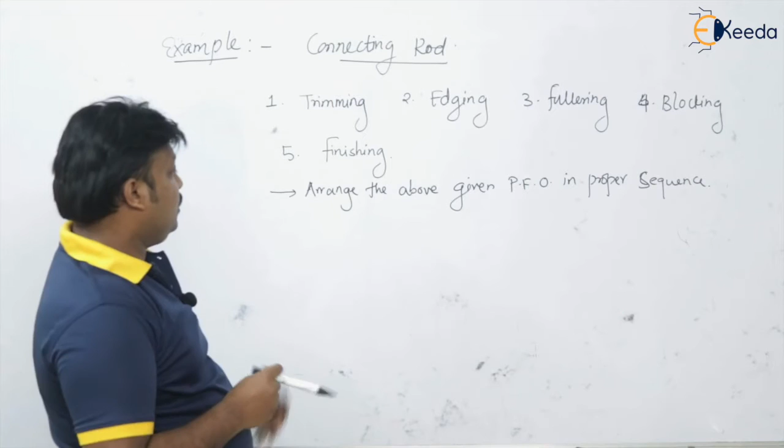So try to manufacture the connecting rod by using this preliminary forging operation that has been given to you. So first of all, how does the connecting rod look like? It will be like this, isn't it? Okay, so this is the connecting rod.

Now this one we are going to produce from a given rod. So which is the first operation that we have to use here? I hope the first operation that we have to use is the fullering operation. So for the given rod, we have to distribute the material from center to the outward direction. So I will go first for fullering. Then here see, the ends of this rod, two ends are not same. We have to provide the necessary material at the ends. So after fullering, I will go for the edging operation.

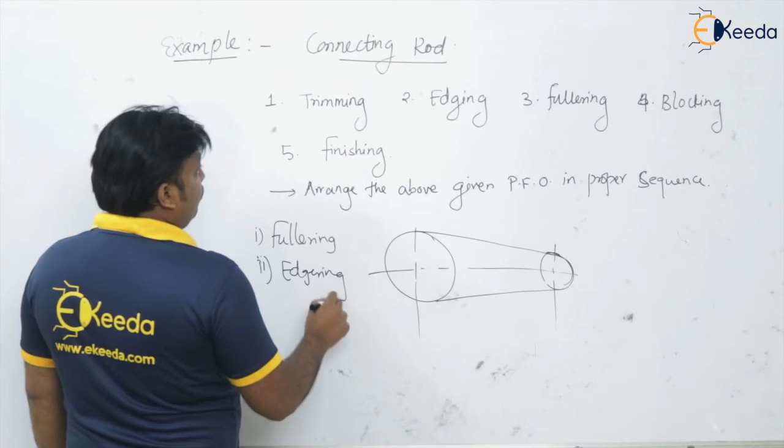Once I got sufficient material at the ends, I can go for the approximate shape, that is rough shape. For producing rough shape, I will move on to the blocking operation. And of course, blocking is always followed by finishing, and finishing is followed by trimming. So in that way, I can make the connecting rod from a given cylindrical rod.

Now if I ask you to manufacture the head of the hexagonal bolt by these forging operations, suppose I am giving you the operations like blocking, chamfering, upsetting and flattening. So which are the operations I am giving you?

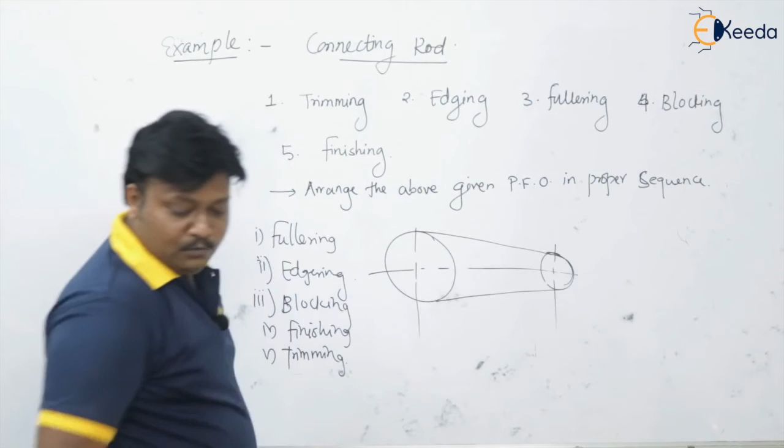Say for the next example, you are going to make the hexagonal head of the hexagonal bolt. Now the process I am giving to you is chamfering, upsetting, then blocking, and flattening.

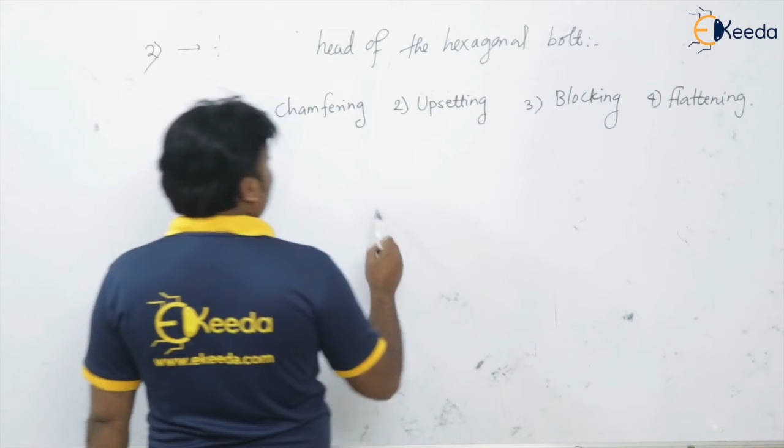So we have to make the head of the hexagonal bolt. Definitely that will look like this - this is the hexagonal head. So if you are having this material, you put it in the die, and you upset it. First of all, what you will do is go for the upsetting.

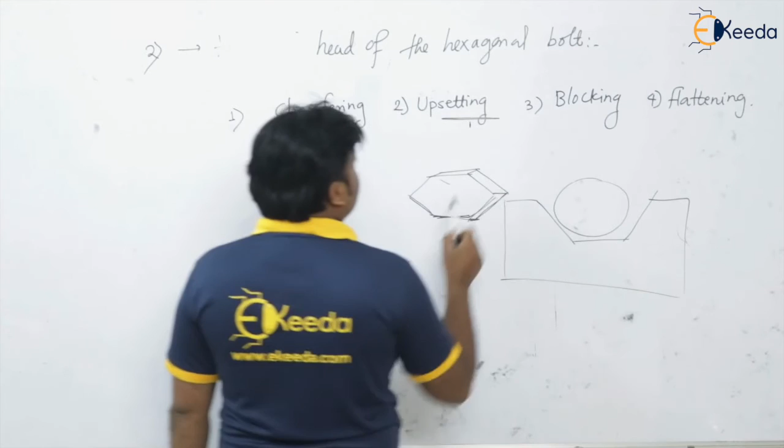Then after upsetting, we will go for flattening. First we go for upsetting, then we go for flattening, by the flat dies. Then we go for the approximate shape, or swaging operation.

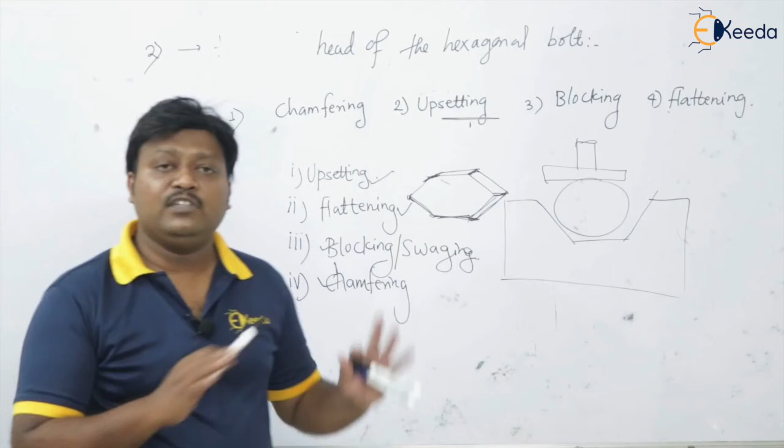Here we generally go for blocking or swaging, and the last one we go for chamfering of the edges - these edges are going to get chamfered. So the correct sequence will be: first upsetting, then flattening, blocking, and chamfering. This is how we can make the given component using these preliminary forging operations.

Now we are going to see the next topic, that is forgeability. So what is meant by forgeability? The definition says it is the ability of the given component for forging, or the ability of the component to get forged with a little amount of force.

What is the forgeability of various materials that we use in day-to-day life for forging operations, or the materials which are subjected to forging? We are going to see the ability of these materials - which material can be easily forged, or which is very poor for forging. So I am going to write here the various materials in decreasing order of their forgeability. First, the material having very good forgeability is the aluminum alloys.

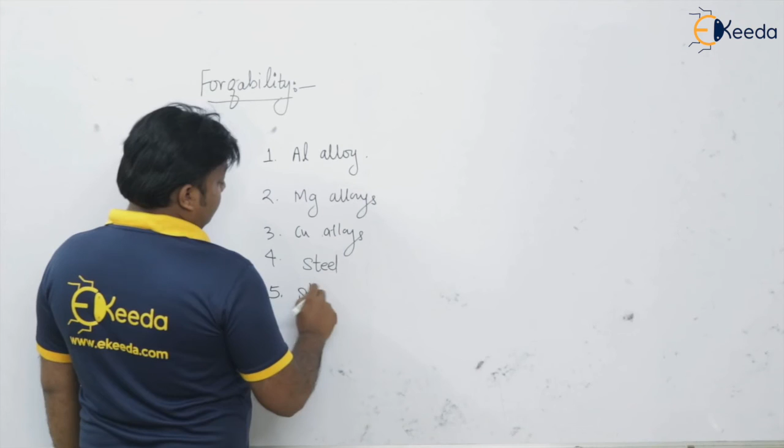Then we have magnesium alloys - after aluminum, magnesium is very good for forging operation. Third, we have copper alloys. Fourth, we have steel as a good forging material. After steel, we have stainless steel.

Then we have nickel alloys. After nickel alloys, we have titanium alloys. Then we have iron based super alloys.

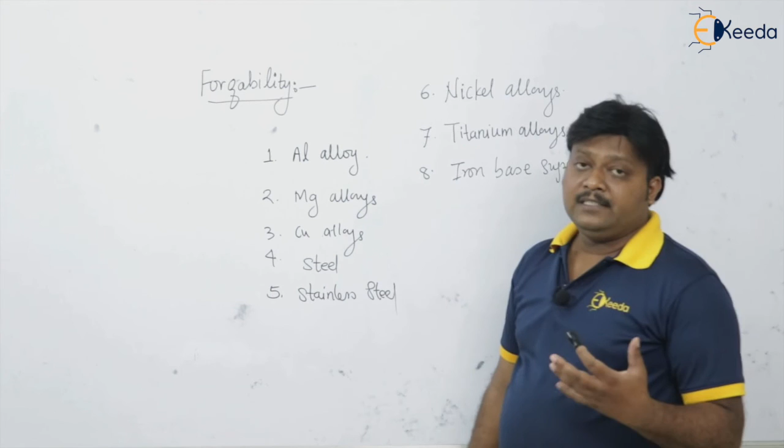Super alloy means these are newly developed materials having very good properties at higher or elevated temperature - they are not going to lose their properties. These are the super alloys. Then we have cobalt alloys, then columbium. At number 11 we have tantalum alloys.

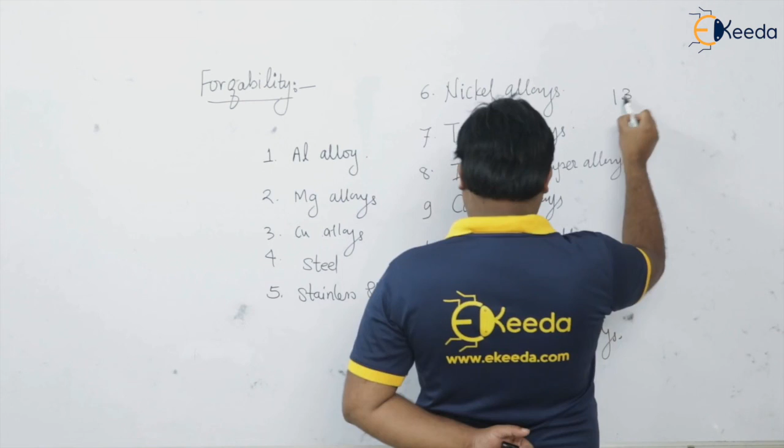At number 12 we have molybdenum alloys. Then we have nickel based super alloys. Number 14 we have tungsten alloys, and at the last, the material having very poor forgeability, we have the beryllium alloys.

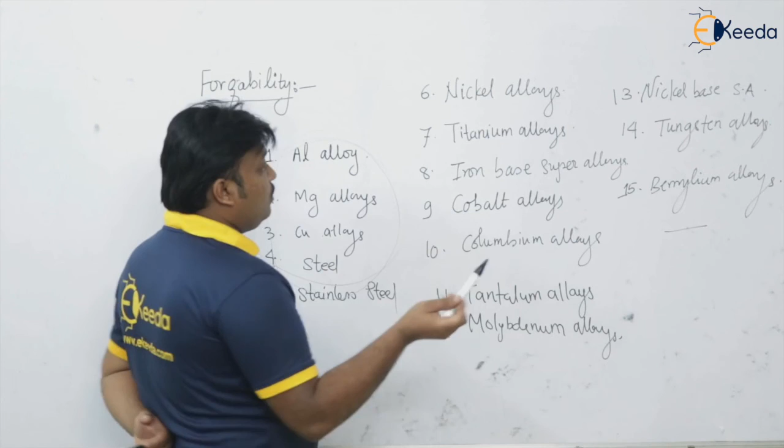So you can see aluminum, magnesium and copper are having very good forgeability. And if you talk about the very worst or poor forgeability, we have tungsten and beryllium alloys. So: aluminum, magnesium, copper, steel, stainless steel, nickel alloys, titanium alloys, iron based alloys, cobalt alloys, columbium alloys, tantalum alloys, molybdenum, nickel based super alloys, tungsten, and finally beryllium. This is the decreasing order of forgeability of various materials and their alloys. Thank you.